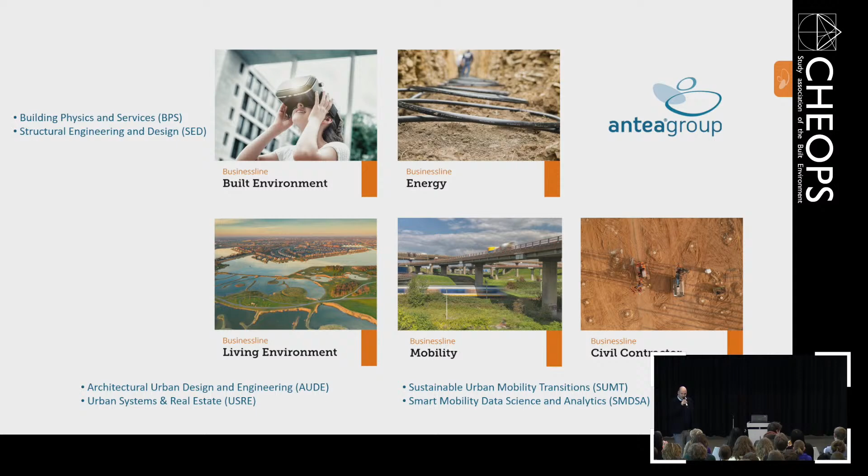So I was looking at all the master tracks that you got. I saw that for everybody we got something to do within our company, and we also work together. So that is quite nice to do.

We do that not only in the Netherlands, we do it all over the world. We have offices all over the world, and like I said, in the Netherlands we work with more or less 2,000 people.

Me, myself, I'm working in Rotterdam. I live in Utrecht. I also choose it in a kind of strategical way because our projects are not located just around your office. It could be anywhere.

Also, the project I'm going to talk about today is literally in the middle of nowhere on the Veluwe. In my first year, I had to travel there by public transport, which took 1.5 hours by train, then 1 hour by bus, and the last 30 minutes I had to walk. So this can happen, but if you love to do your projects, well, you can get anywhere.

We also have in Eindhoven, since 10 years I think, a small hub. We can work with 20 people here. But most of the biggest offices, we work with 200, 300 people, and they're all over the Netherlands.

And I thought maybe you know a few of our projects. Have you ever heard about Thialf, the ice skating ring? There used to be no roof on it, and my colleagues proposed to make it an indoor skating ring. It is already 30 years ago. It was actually the second one in the world, the first one without construction beams in the middle, so you can look all over the ice skating ring.

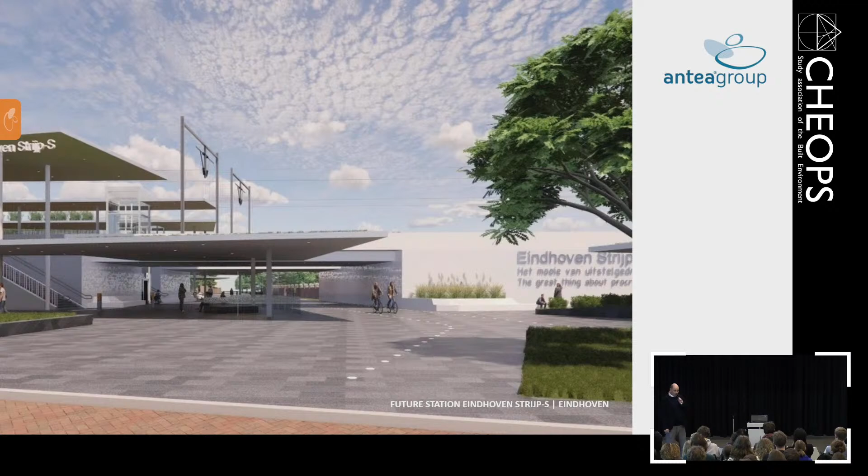But this was mine. I'm also working on a project, Strijp-S here in Eindhoven. We're going to change it completely. I work together with Venhoeven CS on this, and I'm going to talk about the pavilion, which is the theme of this lecture.

I'm a project manager, and I was the project manager of this project. Does somebody of you know what it means, what you do as a project manager? Nobody?

Well, you try to manage a project. And actually, I had to learn this for one of the courses here, project management. Even when you did architecture, you had to do project management.

And these 6 letters are kind of magic for structuring and managing projects. It's a small formula, but if you have a problem to fix, if you have to organize a project, think about these 6 letters. The first one, it's in Dutch, GROTIK. I don't know if there's an abbreviation in English, but this is the one I learned here. There are a few ways to order the letters, but the first thing is that you have to think about money. Every project costs money, and that fluctuates — it's always a dynamic project.

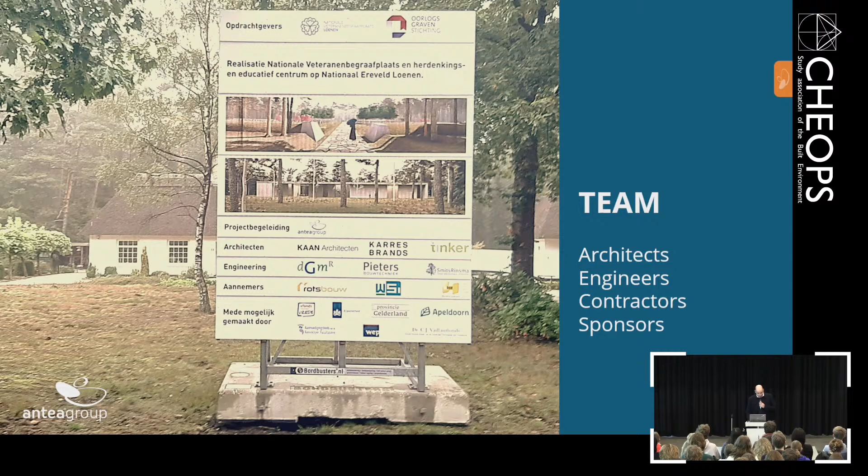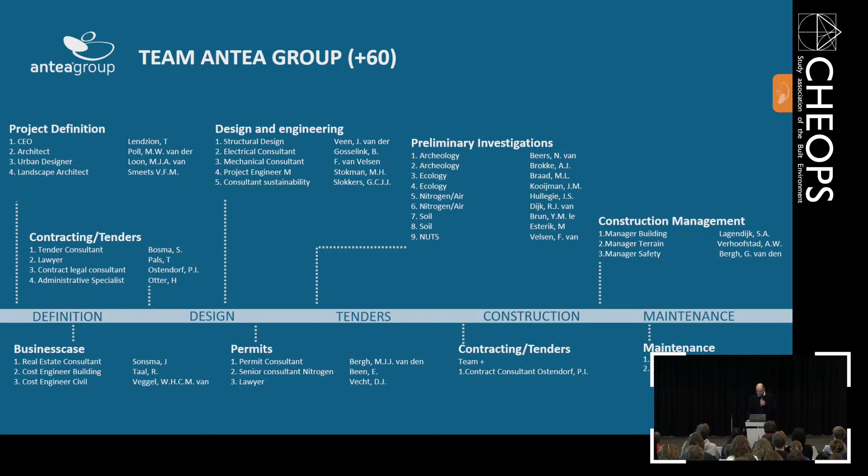And within my company, I also worked with a team of 60 people, and I had to manage this. Everybody needed to do their task at the right moment. Now, which tasks are there? I will go later on in detail on it, but I will tell you now a little bit about the cemetery.

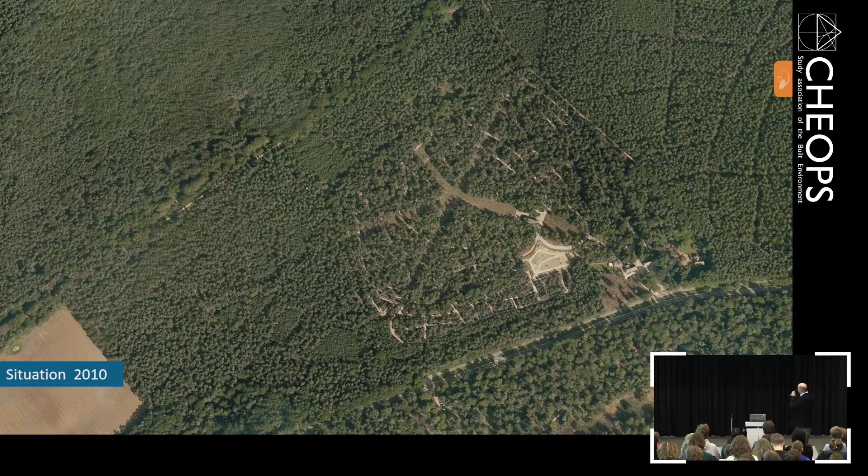We don't have a lot of war victims at this moment, but it could happen, and if it happens, you want a place for people ready. It's a strange feeling to work on a project like this - you build graves for somebody who is going to die, but you really don't want them to die this way.

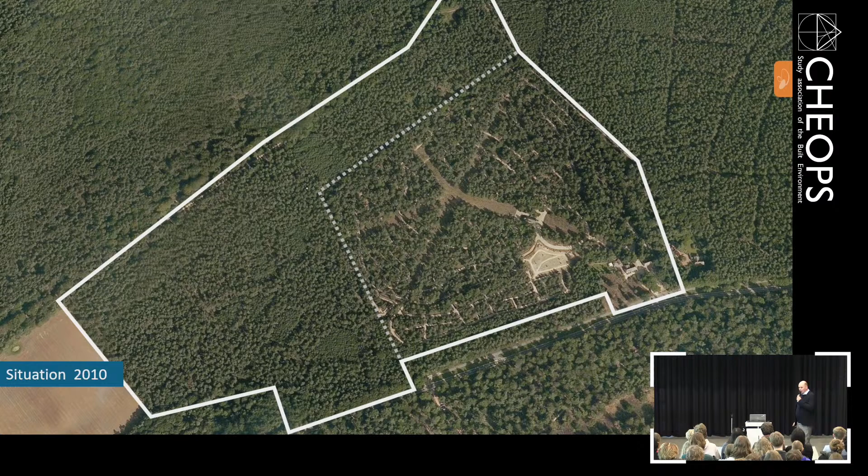Anyway, we asked Karres and Brands architects to make a plan, and the first plan was made by Haspels. If you look at the environment, you have a forest, and within the forest there is a difference in the density - a really dense forest where you almost see nothing except trees, and in the old part, there's a lot of space between the trees so you can look everywhere.

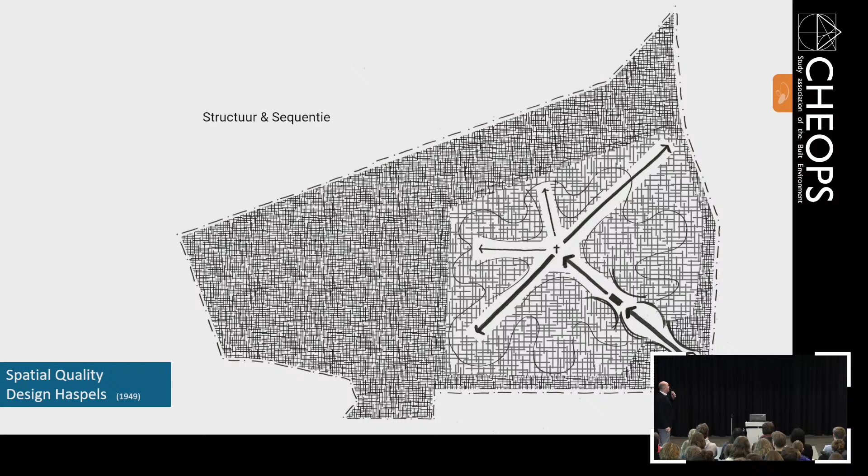They made a design with a cross in the middle, and Karres and Brands needed to find a solution to make an extension. They thought about a few different plans - one, in the right top, was to continue within the structure of the old plan in an organic way, with organic roads, extending one of the sidelines.

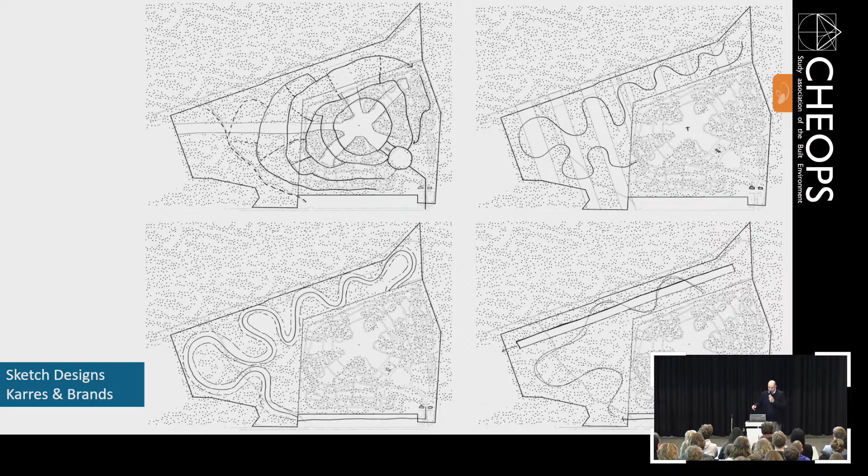But they also tried different variations, and in the end they decided: within the dense forest, we're going to cut the trees in shapes of ovals, forming chambers within the forest, and we'll give every chamber a different identity.

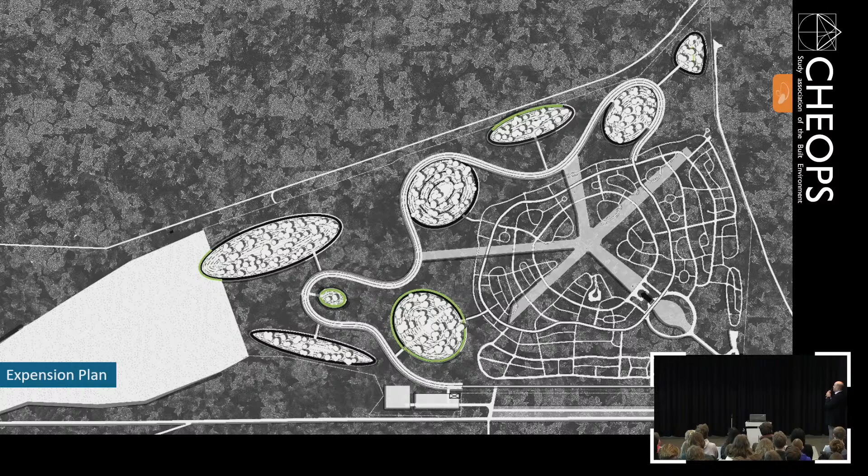But how far do you go? How many graves do we already need? Are we going to build the whole place in the forest at once, or are we going to start with just a few at first?

That's what I did. So before I started, phase 1 was already done - 2 of the chambers were already realized. One of them is like an arena.

Can you see it? Perhaps it doesn't really look like it, but the middle is really 2 meters deeper than the edges. After 3 months of completion, this was already flooded because there was a once-in-a-lifetime rainfall over there. But it was a good test - statistics say it will never happen again, but now we know what happens if it rains quite heavy.

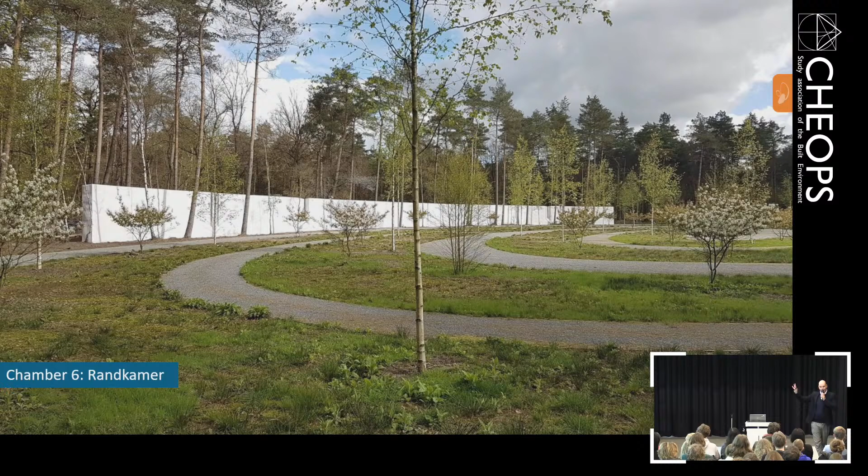The other chamber that was made is called the Randkamer. They made a border, which is quite visible here, and also quite visible if you are there in person. So for every chamber they make within the forest, they have their own identity.

One of those chambers they wanted to give to the veterans, and this is actually the scope of my project - it's number B. It was already cut, but wasn't really built yet. To make this work, we also needed a new entrance, because war victims in the past are still everywhere in the world, and they are transferred to the cemetery here.

But even once in a while - actually every month - 2 or 3 veterans die now, and they wanted to be buried here. So we needed to make a new, professional cemetery with also a building where you can hold ceremonies.

So the first part of the scope was a new entrance. Then we had the cemetery itself, and we made a pavilion where all the ceremonies could take place. But if you only do it once or twice a month and build a whole building for it, that's not enough to make it profitable.

It doesn't need to be profitable, but what they also did with it - the second use for this building - is that it's not only for ceremonies, but also for education.

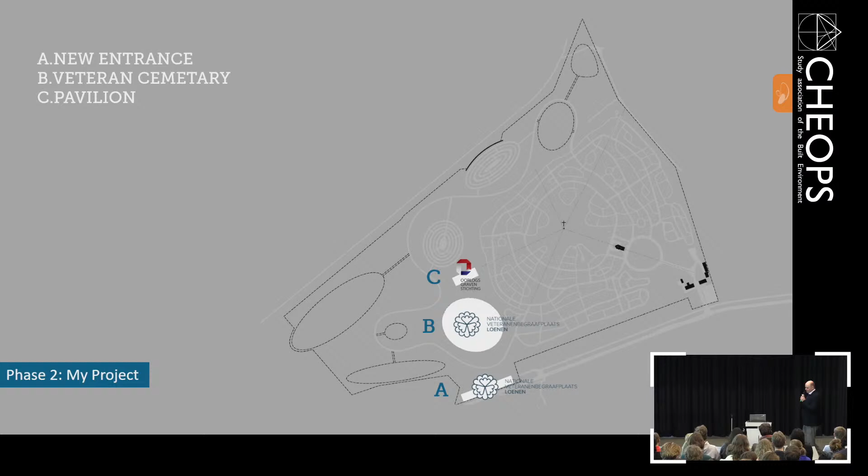So I started here as an architectural student, and I learned about architecture, even a little bit about urban design. But in reality, outdoors, there's always a context. You have to deal with people, but also with factors in the environment. I learned a little bit about buildings, but I didn't really learn about how landscape was designed or even engineered.

But in this case, the cemetery was part of the whole project, so I needed to say something about it. I needed to get everybody together to do their thing. Also, within the pavilion, there was something about education, and there's an exhibition, so I needed to organize a design but also take care it was well integrated into the pavilion.

So it was there, and like I said, the real client is the Minister of Defense, who also came to visit the project once in a while. I had to deal with generals, all high-placed people. It was just a small building, but everybody had their opinion. And it made it really special, especially for me, who did this for the first time.

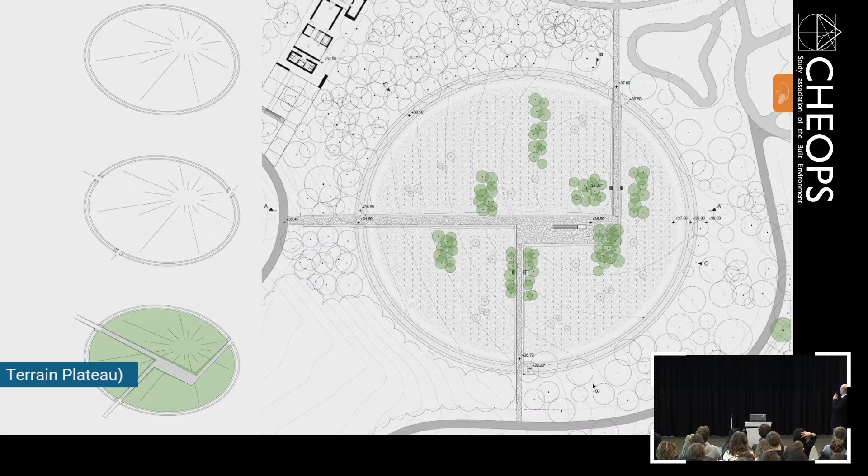It's like a platter, and on the side of the platter you have a rim. That's what I tried to make here, and the height difference is quite big on this place. So what they tried to do is make a plateau at the beginning—put it on the angle, made the rim, a border on the outside, and then, to not displace too much ground, they tried to make an artificial hill, but the paths are still on the angle of the platter. And this is how the plateau was made.

For the pavement, they thought it would be nice if the grass would go from one side to the other, between all the tiles that were placed. But actually, if you try to take somebody who died in a coffin rolling on this path, that doesn't really work. So we had to change it in the end to something more solid.

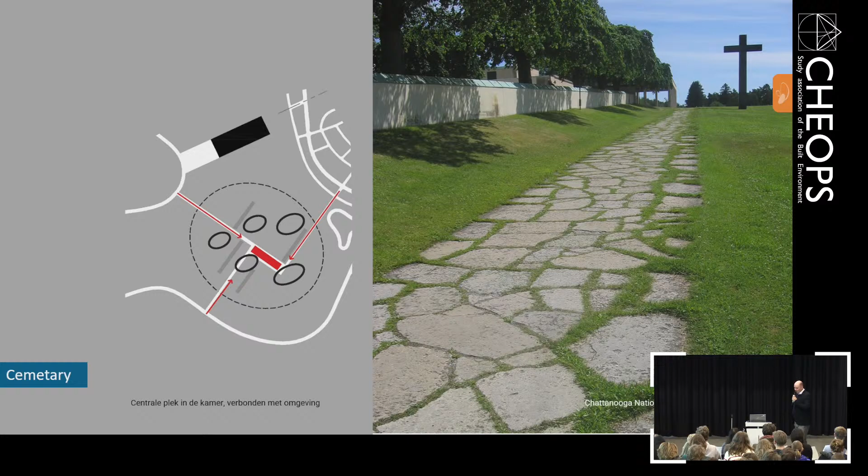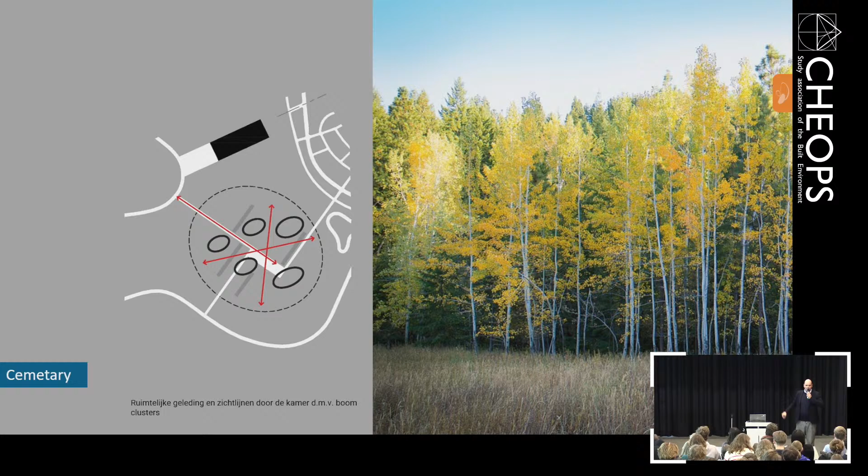Something I didn't realize is that when you want to have a tree, we all know it takes 40, 50 years before it's really grown. The same goes for the grass and all the vegetation there. It looks nice in a render, but actually when you visit here, it will still take 10 years before it's finally in the shape the architects really wanted.

One of the problems, which I also didn't learn here, has to do with how many nutrients are in the ground. They want to have heide—it's a type of vegetation we have here that doesn't like a lot of nutrients. But there are a lot here.

And it's all about the money. There's always a debate about how it should look. That's what the architects want—everything perfect and according to their concepts. And I can understand it, but sometimes things get expensive.

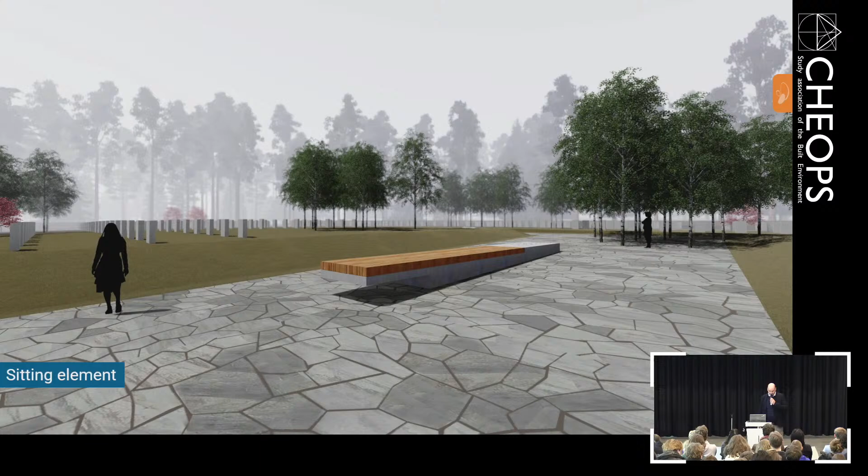For example, in the middle of the cemetery there's a sitting element, I called it—I don't know the real English word for it, but you can sit over here. They wanted to build it and made an estimation of how much it would cost: 22,000 euros. Then I went to the contractor and asked him, can you make it for me? He said, yes, of course—it's going to cost you 100,000 euros.

And then I thought, whoa, just for that? So I went to another contractor, and he wanted to do it for 73,000, or 76,000. And I still thought, whoa, this is a lot of money.

But the architects really wanted it, and then you have a debate: how are we going to get it within budget? There was a solution.

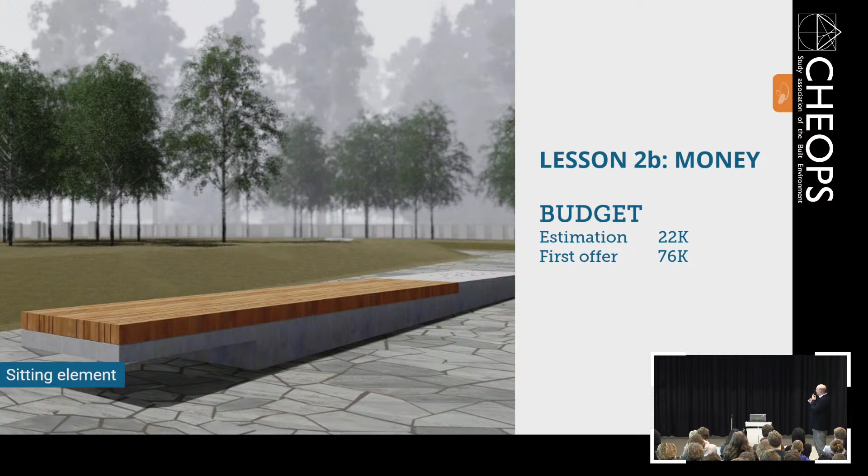The architect wanted it to look like one element, if you look closely. It should be put in concrete there, and all those wooden beams have different widths. If you change it, in this case 4 elements, and make all the same dimensions of wood, it will cost only 24,000 euros. Still a lot of money, but it's there now - you can sit on it. This is one of the things you encounter.

You try to keep everything, in my case, I need to keep the project on budget. And these things are surprises.

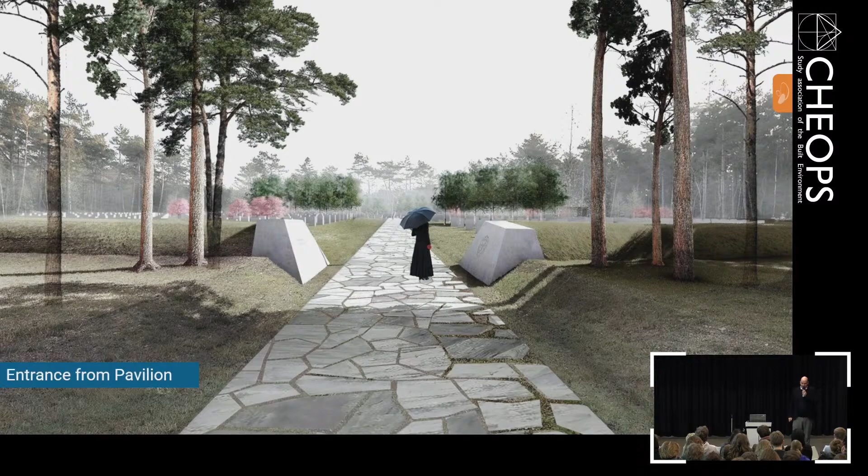The same goes with the elements I thought to make here. There were 3 entrances together, 150,000 euros. We changed it into this one, and for 15,000 euros we found an alternative.

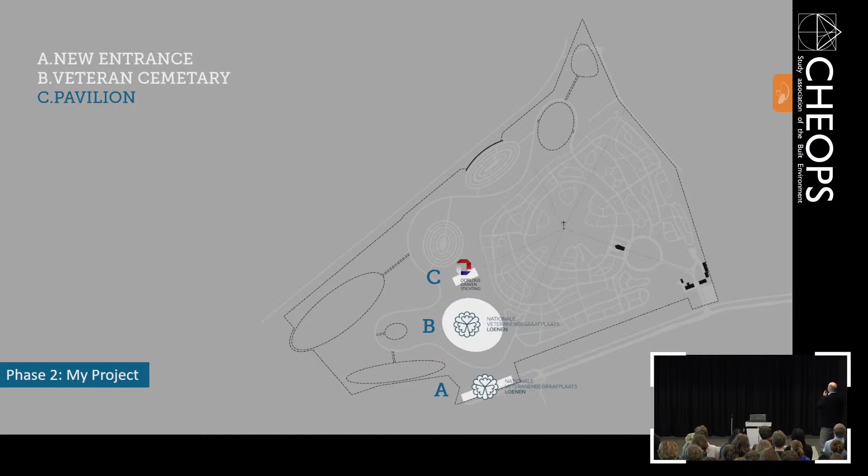Then the pavilion. The pavilion is located between the chamber and the north, I think - yes, in the north. It's the one that looks like an arena. That's where war victims will be buried in the future, and in the south, the veterans.

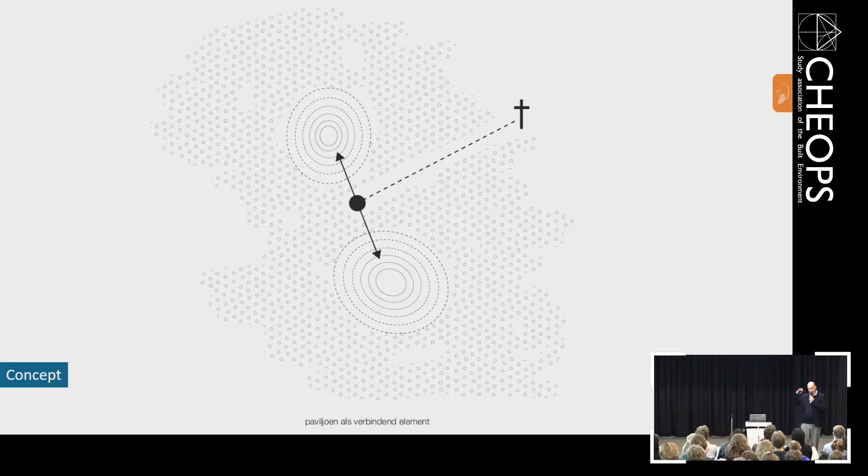The architects had to think about how to place an element here and how it would look. What they thought is, if you really look at the environment, there are a lot of trees within the forest, and if we put down a horizontal element, it will give a contrast there and some nice, interesting views.

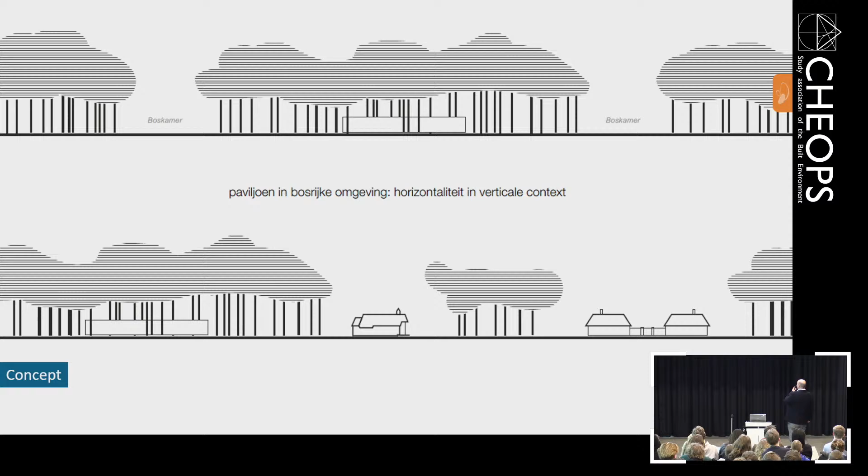And they thought about the organization. Actually, it's the first time I understood a concept. I studied here for 10 years and heard a lot of concepts, but this one was quite easy for me to understand, because what they said is: we're going to create 3 different types of rooms and 3 different types of experiences.

So we have one where, if you look at a ceremony, for example, when you're with your family, you want to feel within the forest - that's the first one. What they created there is 'doorzicht', you can look through the building. If you're on the inside, we can look on one side to the Koeveld, to the center. But if we had created it on the other side as well, it would feel like you're in a train within the environment. That's what they tried to create there too.

The second one has a little bit more use for the exhibition. If you have an exhibition, you really want to focus on the exhibition, not on the surroundings. So they kept it as a closed space with only a roof light.

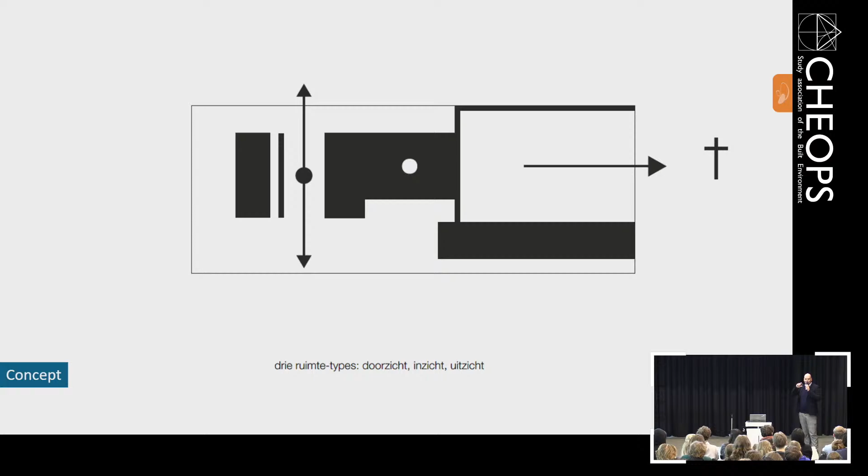And this was the concept, and they put it together, and that actually gave the structure of the building. These spaces were like sandwiched within two concrete plates. And they made it, yeah, quite nice.

You don't see it really clearly here, I think, but the cross is over there, in the center of this space. This is where you look outside, and usually the coffin is placed over there. Then you have the room for the family, where you can look through the building.

Like I said, there are some important people that I had to respond to. But how do you make this, and how do you keep everybody on the same track? When I studied here, I'm not sure if it's still there, but it was called Architecture, Building and Planning. Is there still some planning that has been done here?

Everything at the last moment, just before the presentation? No sleeping? Yeah, well luckily this is one of the things I'm happy I did here, because real life is way easier. You can sleep.

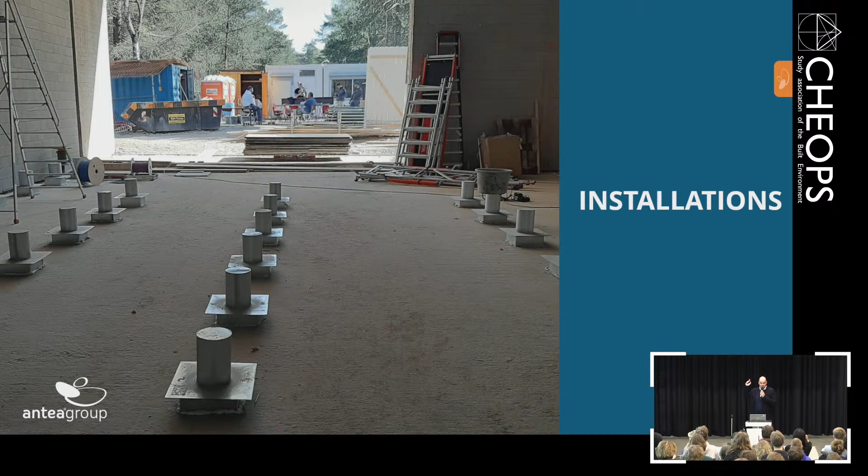And then the process. I only learned to design over here, but there's way more to it. Because before you can even start to design, you need to select architects. And like I said in the beginning, if you have a client using public money, you need to have a tender in which you select a team or an architect to make your design. It takes half a year if it's a big project, just to select.

And when you're an architect, you have to compete within that tender, and usually you have to do it for free. If you win it, perhaps you get paid afterwards. In this case, I don't like to pay architects... no, I gave them even 10,000 euros to make a design in the beginning, which looks a lot, but I will come to that later.

So you have your design, but before you can build, in the construction phase, you need to select a contractor again, and you also need a permit. And before you have your permit, you need to do some research within the environment.

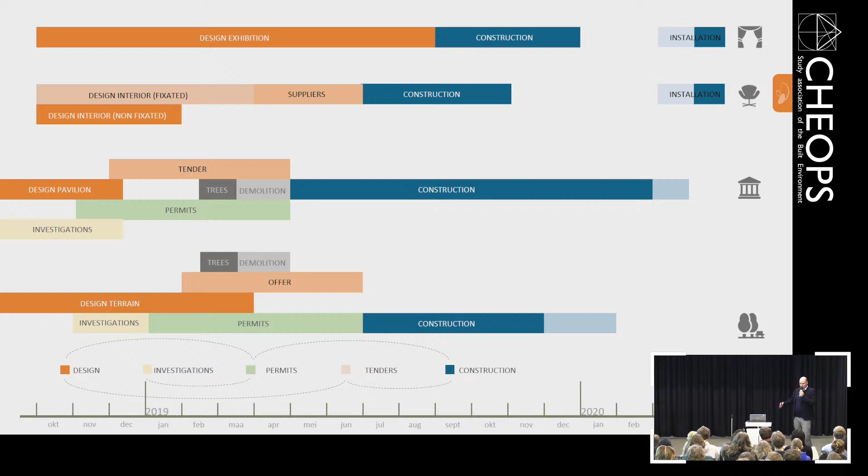For me, these were the four elements within the project I needed to keep on track with each other: the terrain, the cemetery, the building, and then there needs to also be interior in it, and there needed to be an exhibition. And if one of them had a delay, I had to take care that the rest was going with it.

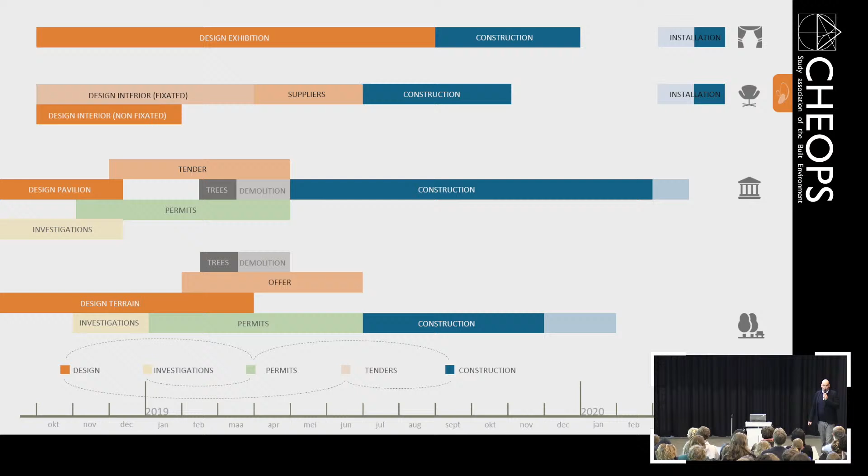So nobody taught me anything about permits. Do they do now? Actually, before you can even build, you have to look really well at the environment. My colleagues are archaeologists, for example, or ecologists, and they all needed to go there, and I was praying, don't find anything. Because if the archaeologists find a place where somebody lived before, they need to document it, and then you have a delay.

But also the ecologists found this guy. I thought it was a snake, but we call it a hazelworm here. Because of this guy, we needed to put the pavilion a little bit to another place, because he was living there. And you don't spot this guy - there are some plants where he likes to sleep, and those are an indication where you should not build, keep away from.

Risks as well. This was actually quite a fun project, because there were two things happening. I wanted to have my permit, so I went to the municipality, and the last moment that it would be definitive was in May 2019. And one week before, the nitrogen legislation here in Holland was cancelled. So the whole project was put on hold.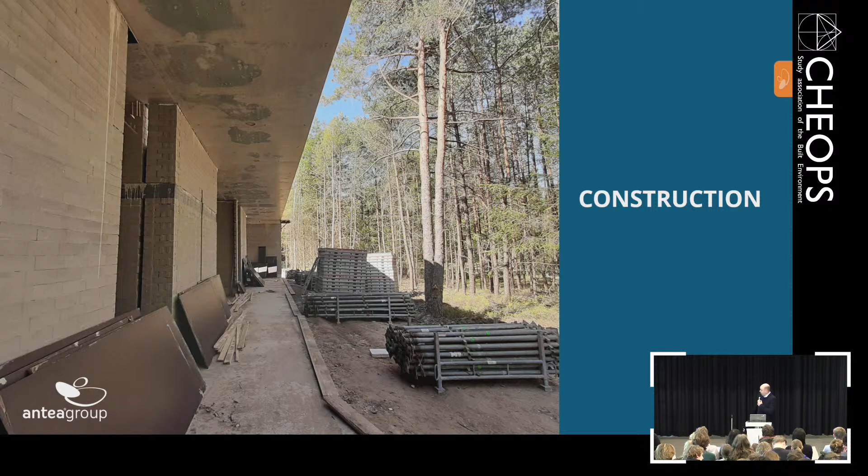Well, then I want to finish this presentation. I told a little bit about the design, a little bit about the construction phase, for example. You try to make the clearest drawings ever and calculate everything, but there are still some experimental things.

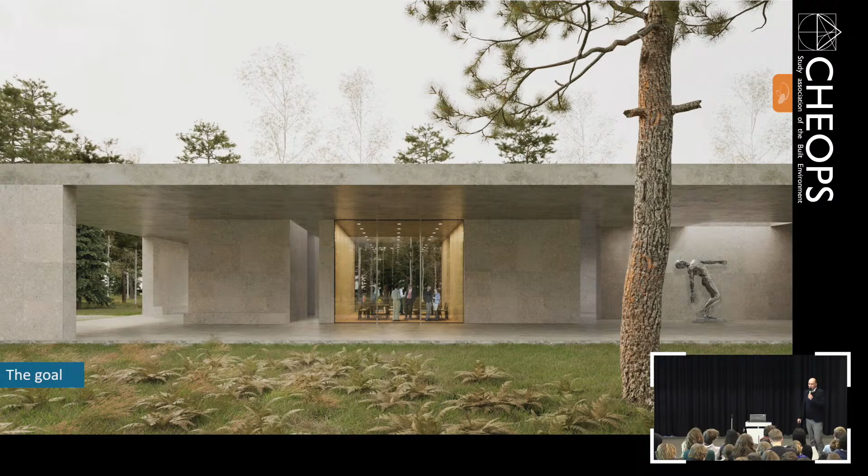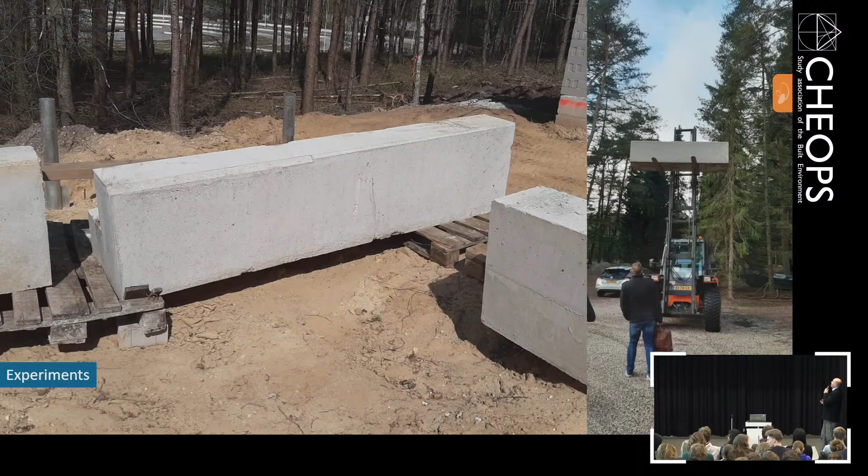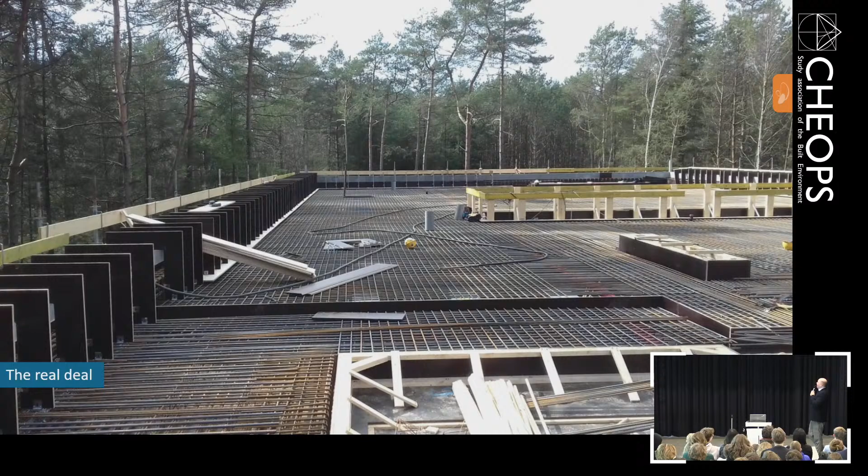They wanted to create a sandwich of spaces between two concrete plates, and this is what we needed to do. But before we did it, there were a lot of experiments outside to make it look like one solid plate on the top and on the bottom. After 10 of these experiments, we felt we could do it. In the end, we made it in just one pour. 20 of those trucks came and poured their concrete.

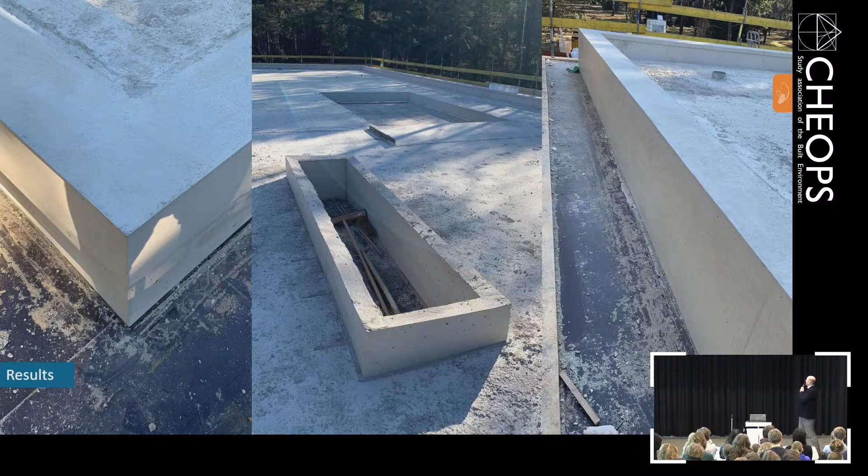And in the end, when we took out the concrete, there were a lot of problems with the dakrand. What is the dakrand in English? Somebody? No? Well, the concrete plate has two functions. One is the roof, and it's a little bit higher so you can put your installations behind it, for example. That part needed to be poured as well.

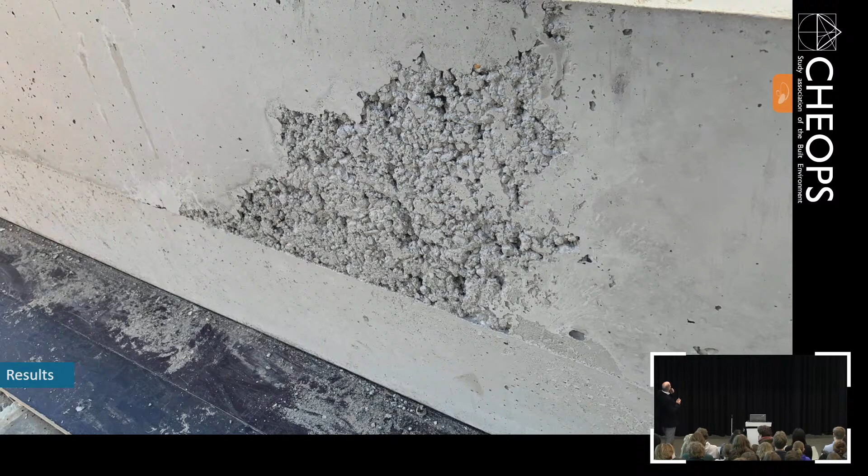So what we tried is to look at the interval. If we poured the first part in the first 2 hours, then waited 2 hours for it to harden, we could pour the rest on top and it would look like one solid plate. But we poured the first one at 3 o'clock in the morning, and the second one at 8 o'clock. The difference in temperature was 20 degrees. So if you look really closely at the pavilion, you'll see there are 2 layers of pouring. But if you take photos from a distance, it all looks great.

So I would really like to invite you to come and have a look. Perhaps we can organize it and I can point out all the details that didn't work out, and there are quite a few. We have a lot of problems with the stone on the facade, but it's quite an experience to be there. The king was also there, and I could... I appreciate this audience even more than him. I just had 2 minutes with him. This is a little bit nicer.

So if you want to know more about it, you can contact me. And I think my time is up, or not? Yes?